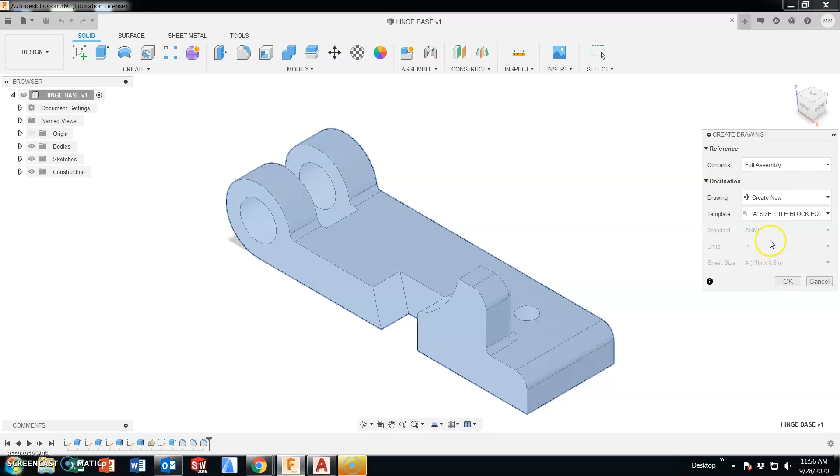As I have the part open in the design, I want to make a drawing of this design, and we want to use the template that we have created. You should be looking for a little T in the bottom left-hand corner of the preview. It's on A size paper, 11 by 8.5, and we're going to hit OK.

So being that we are using the template, our default settings that we created, the information in the title block, all the boxes and the text boxes that we have customized or created should already be there.

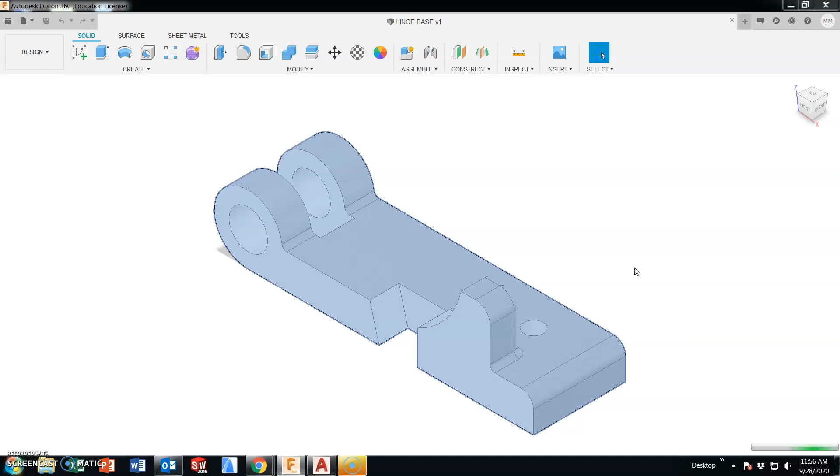When using Fusion 360, the initial view that we put in is known as the parent view. For what we're doing right now, we are putting in the front view, because the front view projects to both the top and the right side.

So here is my default title block, and your name's already in here. And being that I have this one open, my front view, if I created this correctly in terms of view orientation in the part file, matches up.

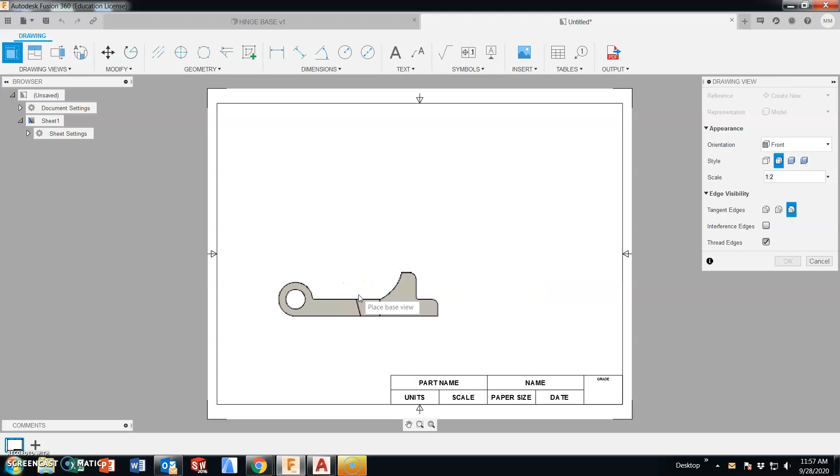Right now it is a quarter scale. This isn't the first one that we've done. I'm going to look to change the scale to 1 to 2 initially. This will save me from having to come back and change the scale, but we could do that.

So as I place this initial view, my parent or my front view, I'm going to also change the fact that I am going to show hidden lines. And I'm going to hit OK.

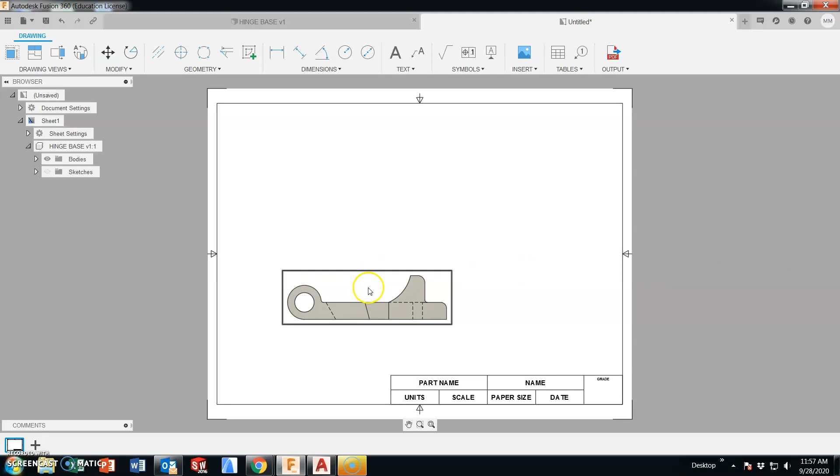Sorry, let's change that to hidden lines without the solid shading.

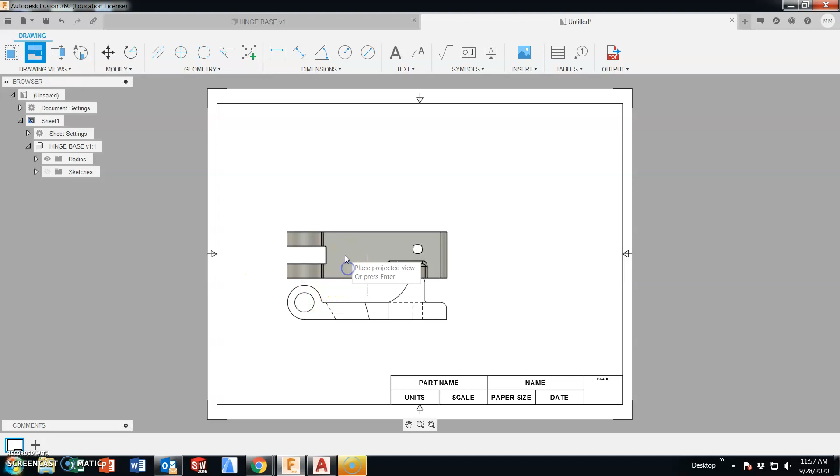Now when I come up to the drawing views, I can now use my projected view. I want to select the parent view, and as I drag straight up and to the right, I am getting my projected views as well as an isometric if I go up at an angle to this upper right hand corner. And I have created my 3 views.

I can change their placement. We do want to shoot for equal spacing in between the views.

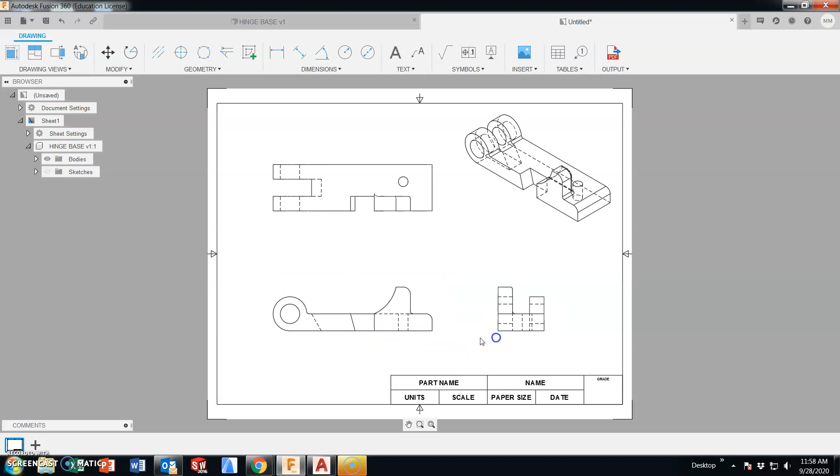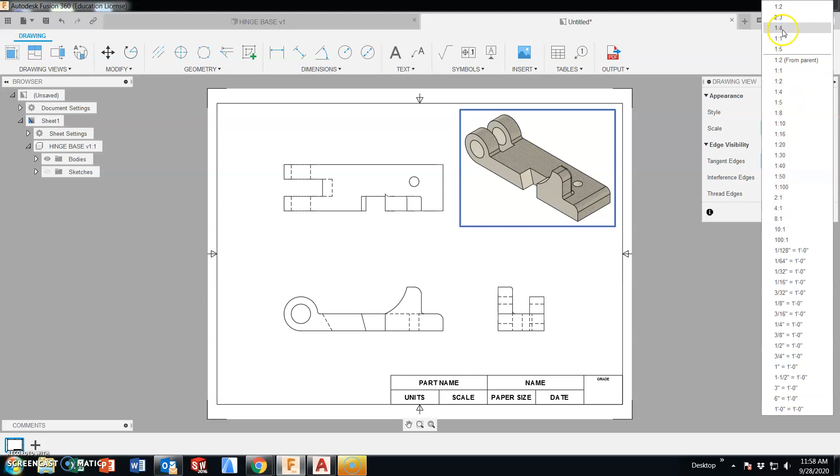The isometric view, having this one be shaded, I think would work better since we can print in color. But I am going to separate this from the parent view. I'm going to make this scale set smaller.

It is just there for reference. We will need to add a dimensioning note, so that frees up a little space here as well. There are some circles.

Probably one of the next things I want to do is put in some center marks. Center mark is here in your toolbar. You have a couple of circles. They just snap right to them.

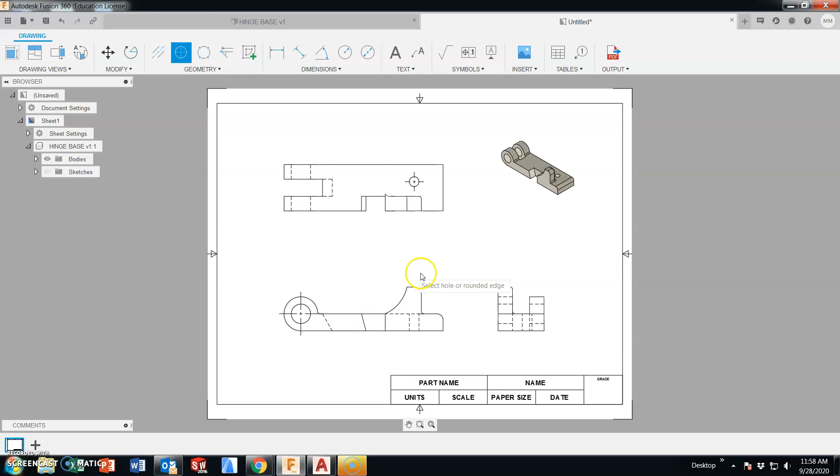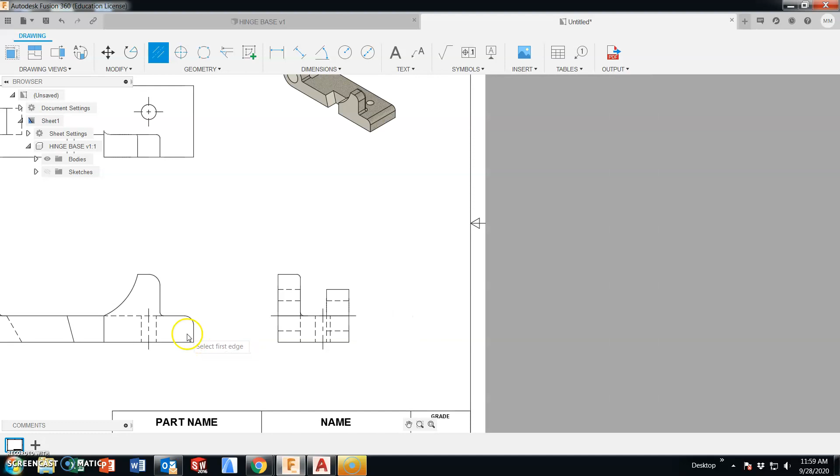And some center lines. By picking the 2 opposing lines, we can create our center lines. And for the drilled hole, this edge and this edge will create a center line. So I have my center lines in, I have my center marks in. From here it's a matter of dimensioning.

When dimensioning holes, holes are always dimensioned in diameter, not radius. So I'm going to snap my diameter dimensions on, staying with the same tool so I don't have to switch back and forth.

This one is an arc, just realized. It is not a complete circle. That will be a radius dimension. And so will this one be a radius dimension.

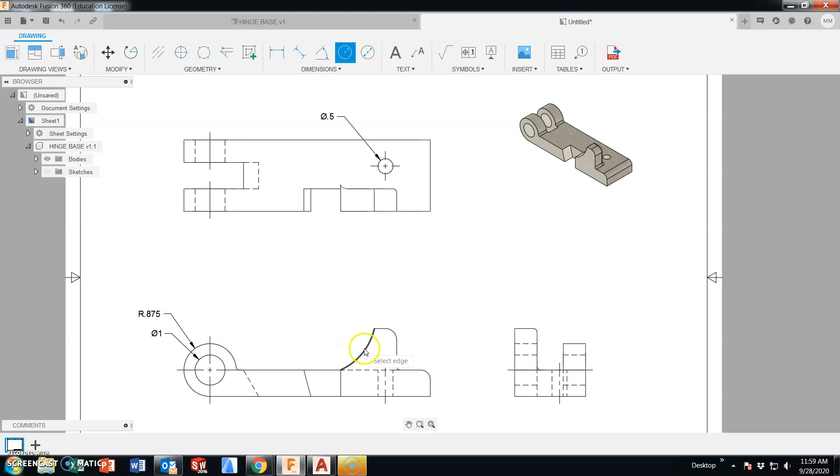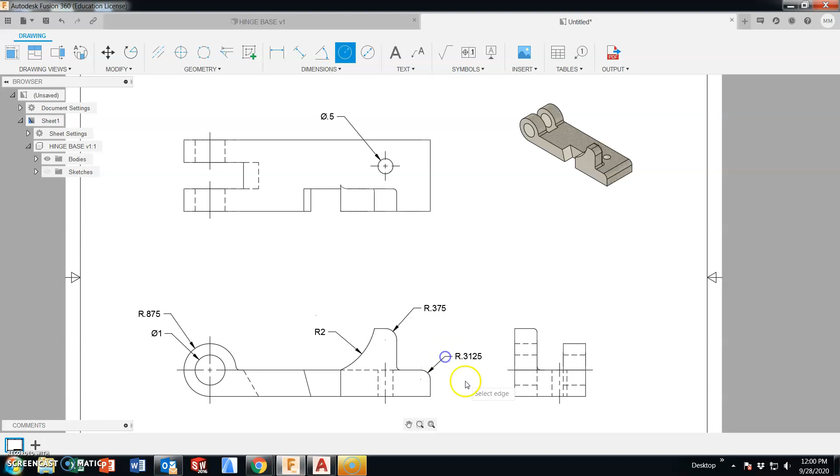Our fillets, which are dimensioned in radius, will be dimensioned later on. Now, there are multiple fillets for these 1/8 inch radii. This one here and this one here are only used one time, and they are larger fillets. For this one, we're going to dimension them.

These other fillets that we used, we're going to put them off to the note as being the casting fillets. Angular measurements, there are two.

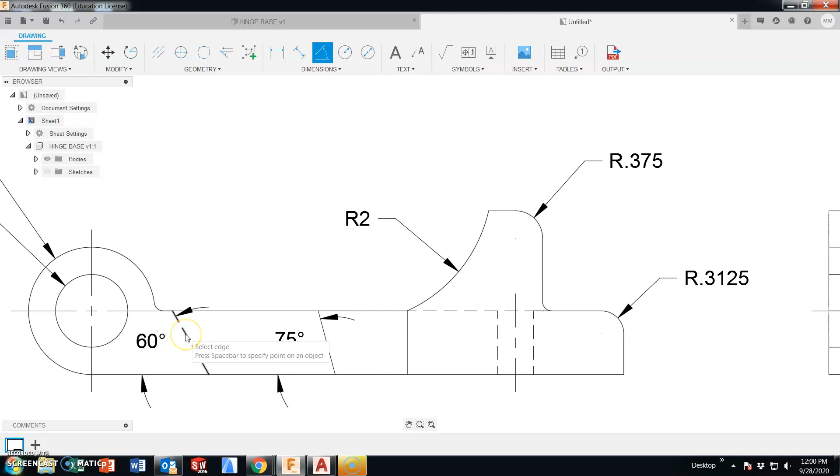We will dimension this hidden line again, just based on the part itself.

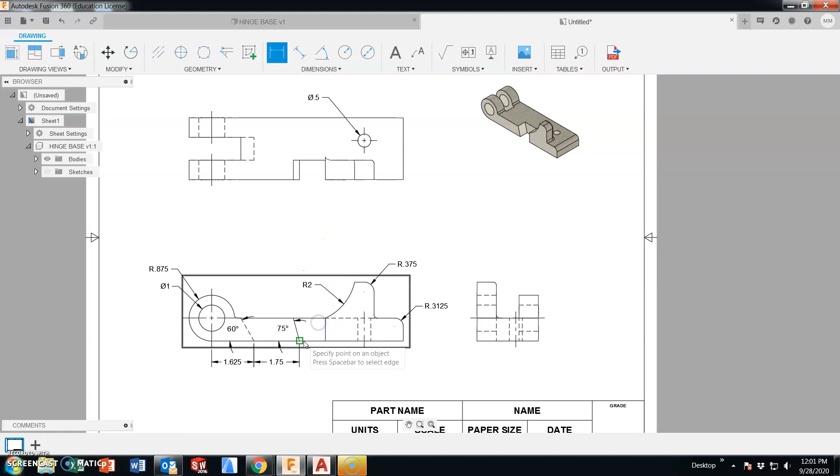And we're going to put quite a few dimensions here across the bottom and line these up. We do want to try to place our dimension text in between the arrowheads. We should easily fit this one—just drag the text and place it in between the extension lines or in between the arrowheads.

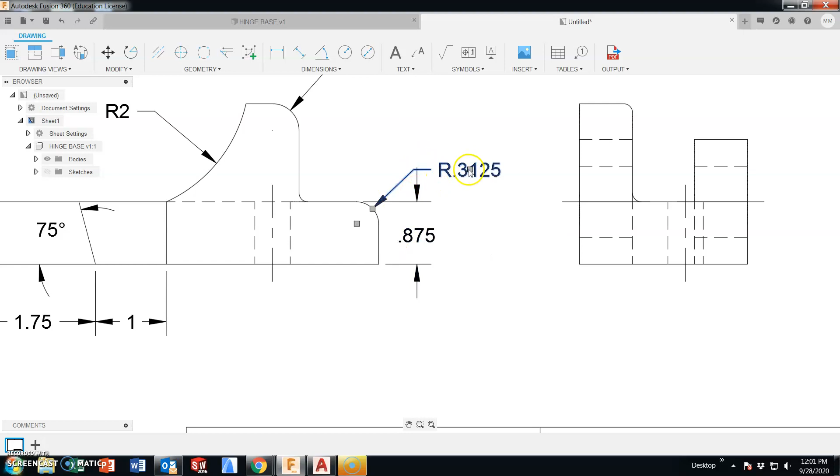Another linear dimension here in the front is the vertical distance down. Again, this is one that we can move in between the arrowheads and it fits quite nicely. I now have a little interference with this leader line. I am going to adjust its placement so there's no interference there.

What other dimensions do I need? At this distance from here to here is 0.75. Again, another one that can move in between the arrowheads quite easily.

And a distance from the front—sorry, it is in the front view from here to here. See if I can move this somewhere better.

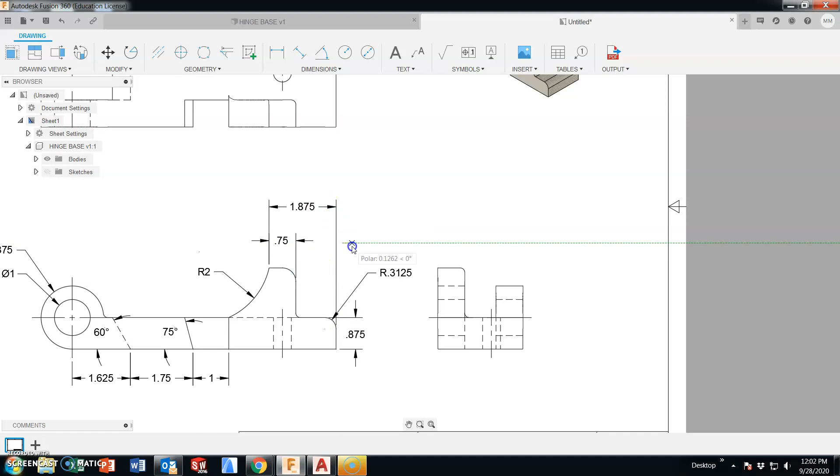I think this pretty much takes care of the front view. Nope, let's put our overall dimension from the center to the edge. That should really take care of the front view in terms of dimensioning.

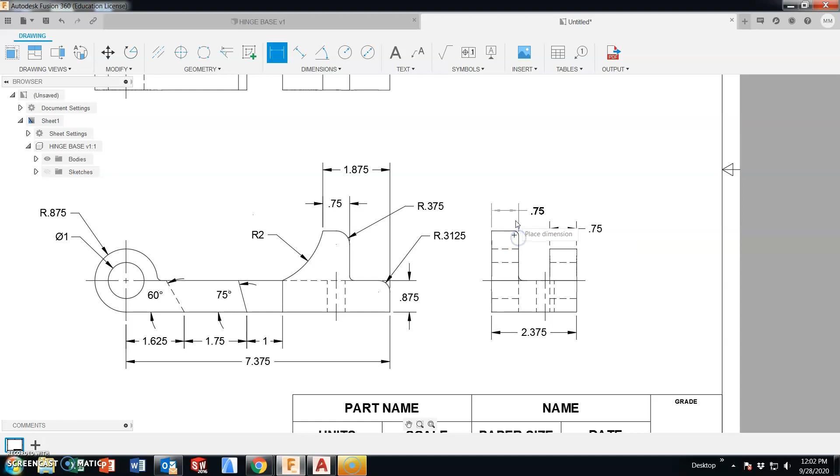To the right side, width would be a good place to start. This dimension of 0.75, and this dimension, could be taken in the top view as well. But we're going to have quite a few more dimensions here in the top.

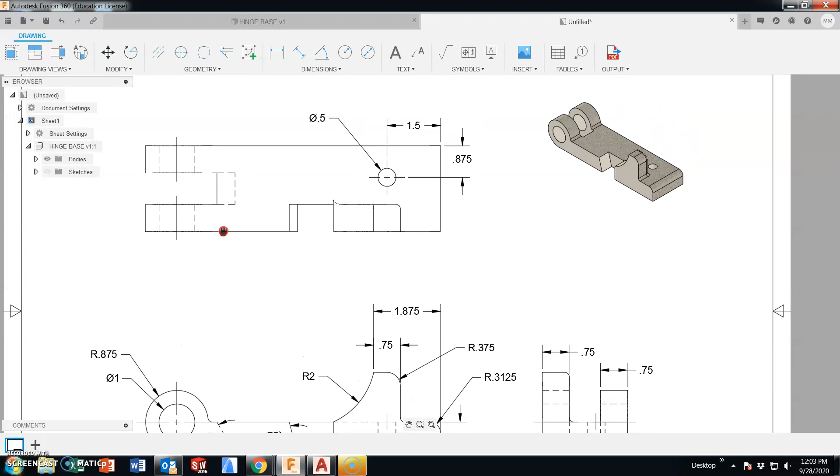Hole placement, vertical and horizontal. We've already set the diameter. And this one can move inside. Actually, that might be about it here in the top.

60-degree angle, 1 inch back. We do have a tolerance. This 1 inch diameter hole is on the upper side of the tolerance.

If we double click, we can come in here and modify the dimension text. So I want a diameter—I want to add a symbol for diameter of 0.998 to 1.000. I am modifying this text. The leader line stays there. That is to dimension the tolerance.

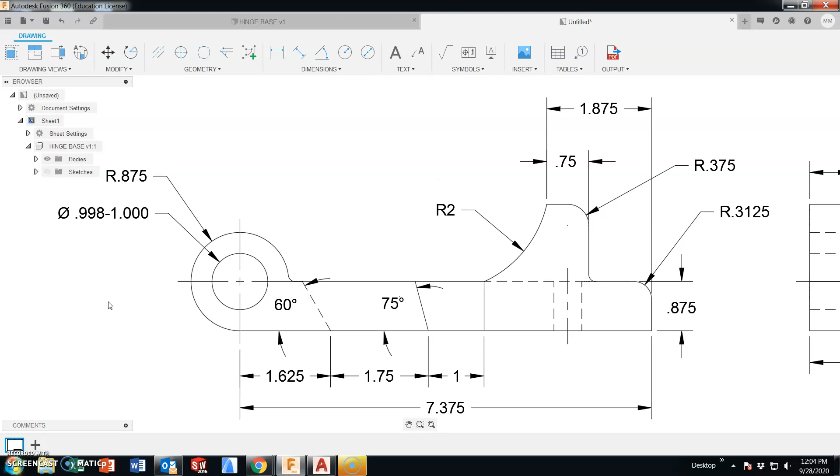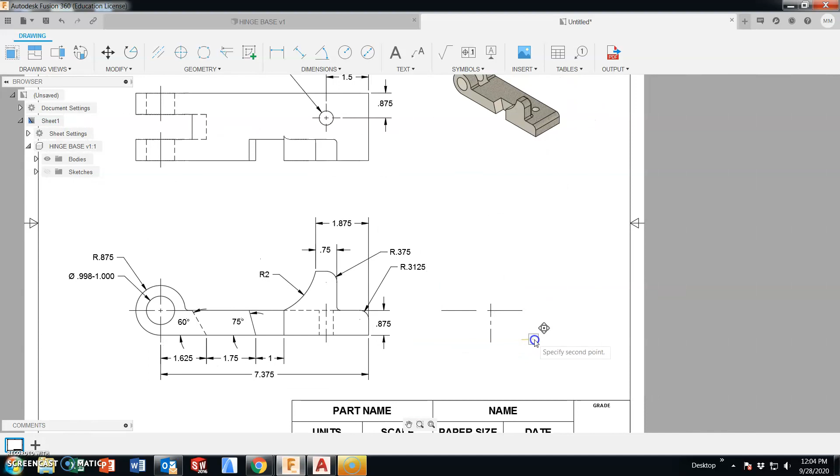You need an overall height dimension. This would be a good one to place in the right side. A little crowded now. Another way I can fix the crowding is to actually move the views. If I just move this one over a little bit, it eliminates some of the crowding. I do need to adjust to have equal spacing in between the views.

Lastly, I need to make a dimensioning note for rounds and fillets. You're adding a text box in this upper right hand corner. Dimension text needs to match—I prefer to center justify it. This part has both rounds and fillets in all capital letters, that are a radius of 0.125.

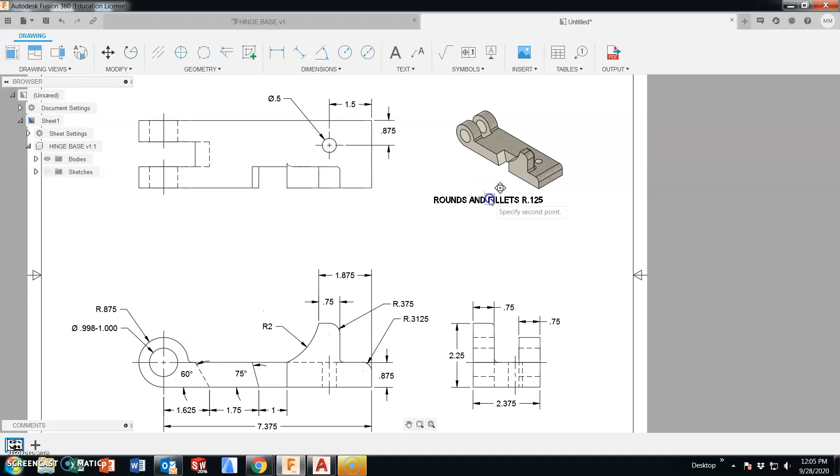We can adjust its placement by dragging it.

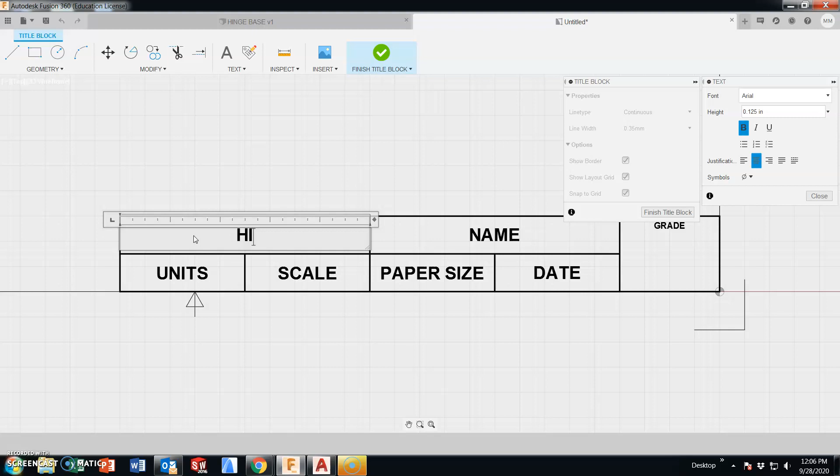Next, we need to edit the title block. By selecting on the title block, I get the option to edit. This is the Hinge base. Inches. We use a scale of 1 to 2 for the top, front, and right side views.

This we've already changed. I'm using my default template. Yours has already been changed to A size. Your name's already here.

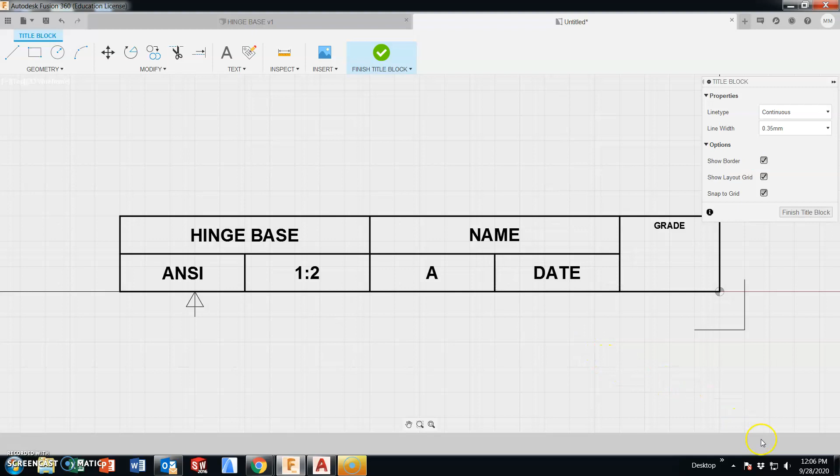And a due date of Wednesday, which is the 30th. Sorry, you're not in class on that day. I'm thinking about Friday the 2nd.

I am done editing the title block. We are now ready to print this when you are in class and submit it.